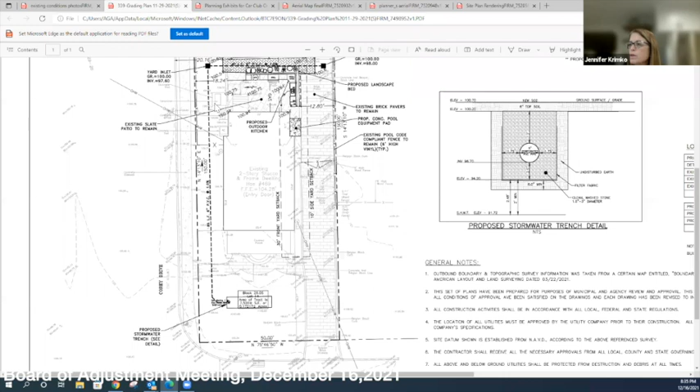Yes. To your knowledge, when the generator was put in, did the installer get all the necessary permits? Yes, I hired a contractor who took care of getting all the permits. When it was installed, you had no idea it was in violation—you thought it was put in as was approved. I actually got approvals for every part of the job, so I was thinking that I was in compliance.

According to the zoning officer, it was supposed to be installed on the other side, and then it was installed in this non-conforming location. Why was it installed here? Is it possible to move it to the other side, or does it have to remain here? If it's on the other side, it's going to be in the driveway. And didn't you also tell me it had to do with the run from the panel as to the location of where it had to be? The plumber made mention to me that it had to be the first thing off of the gas meter. Gas meter being on the opposite side of the house, on the Corey Drive side. That's why he put it where he did.

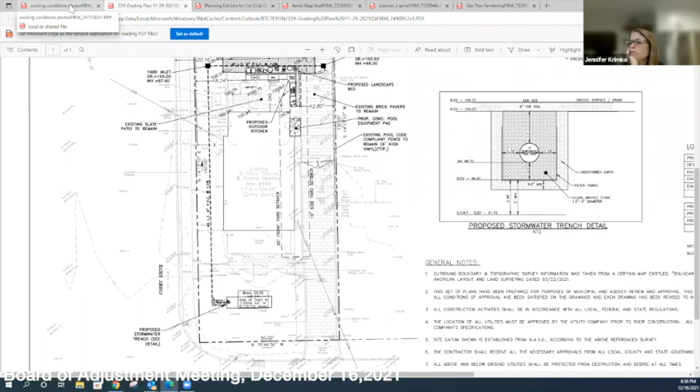How long has it been there? A little over a year and a half. Have there been any complaints from any of your neighbors that you're aware of? No. And in looking from Corey Drive, is that generator visible in any way? No, it is not. By having it on the Corey Drive side, it's actually farther away from any of your neighbors than it would be on the other side. So when it does go off, it's going to be further away and less of a nuisance to your neighbors next door and in your backyard. That is correct. Okay, that's all I have.

Jen, are you amending your application to include that? The notice included it, so yes, to the extent my application needs to include it, yes, I am. And how many feet is that off the property? I'm going to have the engineer testify to that. It's in my notice, Mark. I don't remember off the top of my head. I'll check it.

Thank you. So, Mr. Chair, that's all I have for Mr. Sardo. I'd like to call— he's open to questions from the board, and if there are no questions, I'd like to move forward with the engineer and the public. Does any board member, before I switch to our engineer, have any questions for the applicant?

No board members. Okay, anybody from the public have any questions for this applicant?

All right, let me move on to Mr. Worrell, your engineer. Hopefully when we're done with Anthony, he'll say he's satisfied and we're good to go.

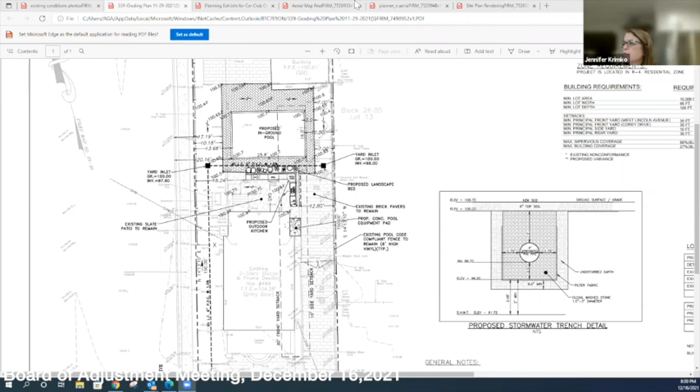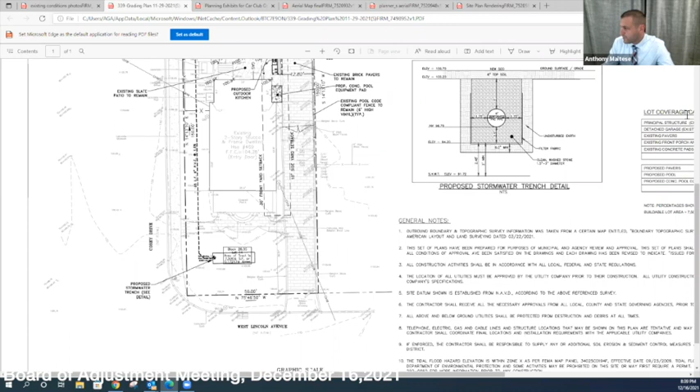The property is situated at 469 West Lincoln Avenue on the corner of West Lincoln and Corey Drive. It's in the R4 zone. The requirement for the R4 zone is a minimum 10,000 square foot lot area, whereas we have 7,500 square feet, so we're undersized. The lot width requirement is 90 feet, and we have 50 feet, which creates a skinny lot. We essentially have a hardship in that we're much smaller and narrower than would typically be allowed, and on top of that, we're a corner lot, so we have 2 front yards.

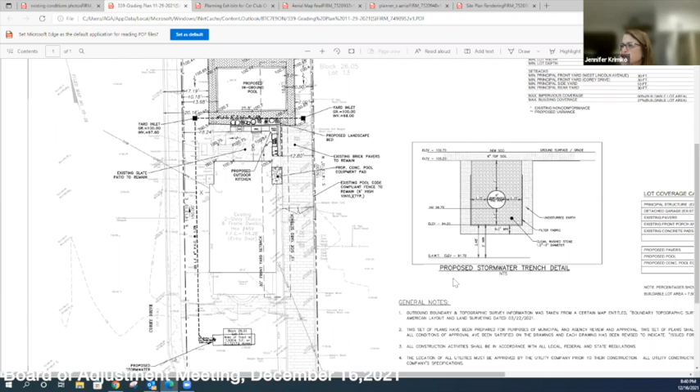You can take notice that per the last letter from Mr. Maltese, we adjusted the front yard setback to 30 feet from Corey and also from Lincoln. Knowing how many other members there are and recognizing what the board is interested in as it relates to this application, let me walk you through it — the changes to the plan to conform to Mr. Maltese's letter are not as important as what we're proposing here today.

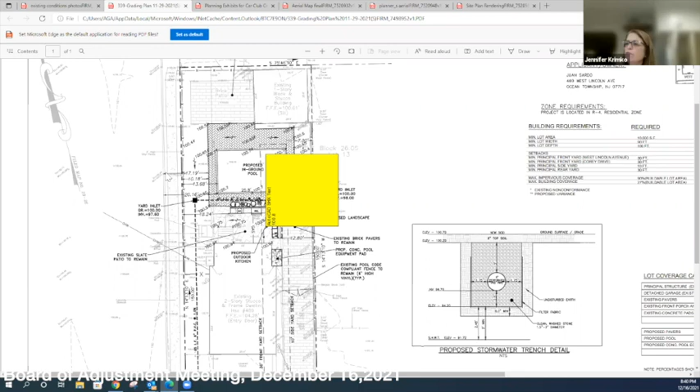So we're proposing, where I'm pointing out here, an in-ground pool behind the house with a patio and an outdoor kitchen. Is that correct? That's correct. Okay, and what is the setback of the pool from the Corey Drive property line? The pool is 13.68 feet, and the patio is 10.1 feet. Okay, so both the pool and the patio would conform on that side if it were a side yard, correct? Correct. And the same goes for the kitchen — the kitchen is 18.24 feet from the front property line.

Now, in looking at the east side, the plan shows the pool is at 10.5 feet, so that does conform. There's a 3-foot section of the patio that is 7 feet, which is permitted, but in the areas where the patio widens, it's technically supposed to be cut back to 10 feet. Is that correct? Yes. Okay, so we're just asking for a variance for those portions of the pool patio that are not at the east end of the pool, just so we can have a squared off patio. Yes, that's correct. Okay, and it's obviously much farther away than the existing garages, and there is a fence on the east side as well.

And you have an area here that you indicated as a proposed concrete pool equipment pad on the side by the driveway. That's behind the fence, and that's in a conforming location and would be shielded from view. Correct. Okay, and to answer Mark's question, approximately what is the distance of the generator from the front property line on Corey Drive?

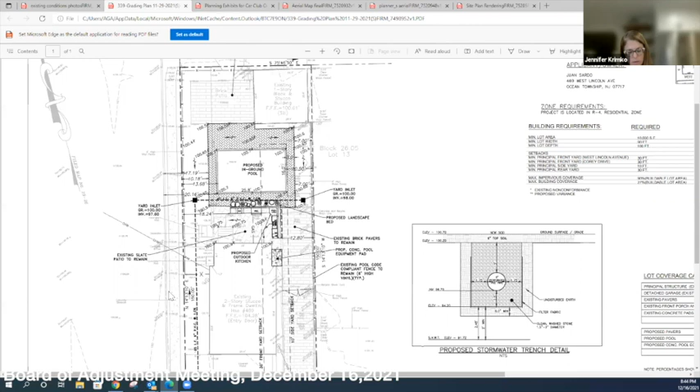Item 6, we agree that it's in Zone X, and we'll clarify that on the plan. Yes, we did. Okay, what utility service connections will be extended to the kitchen area? Water and gas. I would assume electric too. We don't have electric shown, but I would assume electric as well.

So if the board were to approve this and it is going to be electric, you would also show that on your plan as well? If they like, yes. Mr. Chair, that's really all I have as it relates to this.

Let me ask our engineer, do you have any comments, Mr. Maltese? Just a point of clarification, I scaled the drawing and I measure 7 feet for the generator to the front property line, so I want to make sure that's corrected for the record. The revised plan did address the comments I had in my November 12th letter, so I don't have any other concerns. I believe the stormwater was the biggest concern of mine, and that was sufficiently addressed.

So I'm fine with this. Okay, thank you, sir. So does any board member have any questions for this? I just have one question.

Can you give me the approximate dimension of the extended pool patio? It only runs for what, 10 feet more, at the point where it's wider than 3 feet? I'll get you that number. Approximately—I would put that in the resolution. That's fine. If you just send me an email, I'll scale it out and get you that number.

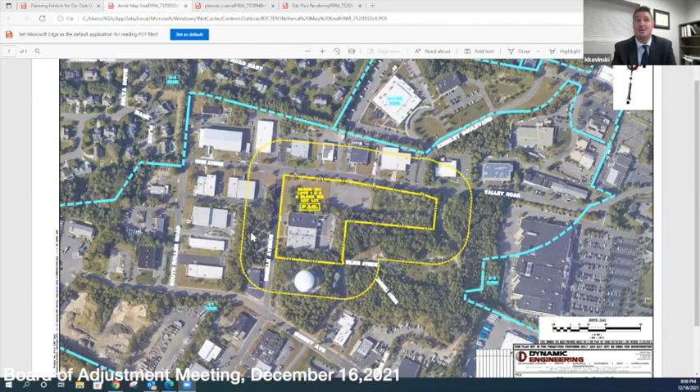The site is located within the I-1 light industrial zone. There's currently a 32,758 square foot existing multi-tenanted warehouse facility with parking lots on the east and west sides of the building. There are 2 existing driveways, one for each frontage, and the remainder of the site is mainly open space and wooded areas. The aerial in front of you is a color exhibit of the site and surrounding areas.

To the north, which is the top of the page, we have Rose Avenue with commercial and warehouse uses beyond. To the east, we have the township-owned property with Wegmans beyond. To the south, we have the township water tower and commercial and warehouse uses beyond. And to the west, we have Brielle Avenue with commercial and warehouses beyond.

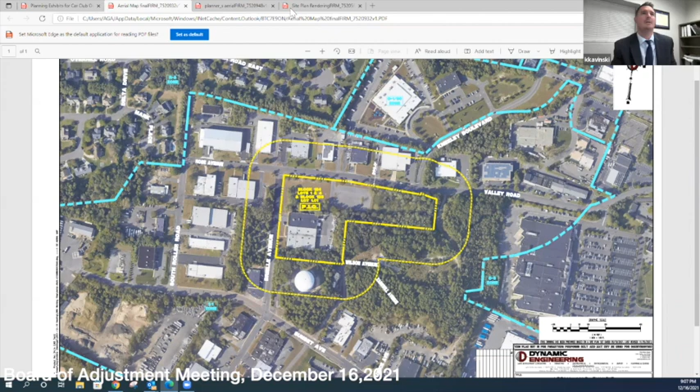Jen, do you have the minor subdivision ready to go? No, I don't have that one up. It's no problem. So as part of this application, as we said, we're doing a minor subdivision, and I believe it's referenced as A2 in your packets.

The applicant is seeking a minor subdivision to relocate the existing lot line between the applicant's parcel and the township parcel on the eastern portion of that drawing. The applicant proposes a property swap between block 184, lot 1, and the township's property directly to the east, which is block 180, lot 1.01. This will create 2 new lots and allow for a more regular lot configuration, as well as reduce some of the retaining wall heights as part of our application. The applicant's property would grow by exactly 4,646 square feet to a total of 6.5 acres, and the township property would decrease by that same amount to 1.26 acres.

The township currently has a non-conforming lot depth of 127.7 feet, and the applicant's parcel has a non-conforming lot depth of 191.7 feet, where 200 feet is required, with the proposed subdivision taking place.

Well, wait, let me jump in. The lot depth is really technical in nature, it's just a matter of the irregularly shaped lot, and you measure it at its shallowest point. But the lots, even though the lot depth is technically getting smaller on ours, the lot's getting bigger. That's correct, it's just that some of the land we're buying from the town is shallower, so it goes towards our average. So we're not really changing our configuration. Not at all, it's just a technical variance where we're getting more lot area at a shallower depth. Correct. Okay, sorry, so yeah, no problem.

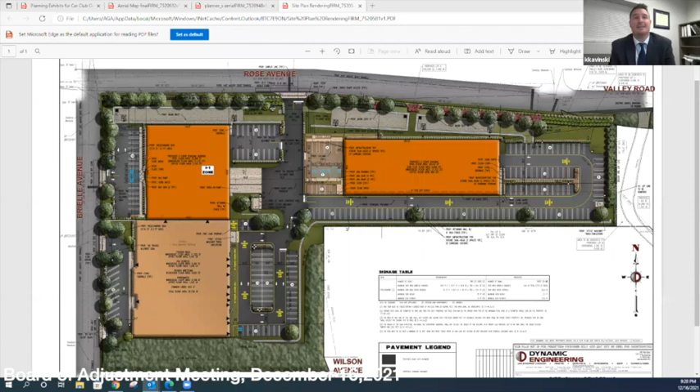We're proposing three freestanding signs for the development. One sign is located along Rose Avenue, west of the driveway access. It's 35 square feet in area and 7.5 feet tall. And then we have two signs along Brielle Avenue near both driveway entrances. They're really, as the board will see, more site identification signs than anything else, with the address. Yes, and the area of the signs combined is less than what would be permitted for the two signs.

Mr. Chair, that's the sum of the engineering testimony. I would ask if Ben or Jim have any questions. For 21 years I've been saying Bill and Jim, so once in a while when I get tired I might slip, I apologize.

I'd ask if the board professionals have questions, the board, and then obviously the public. No, I don't have any questions. Does any board members have? Ms. Tallarico, I have a question.

What exactly is a car club? What type of business is this going to be? I know that the architect who designed it is going to go into great detail as to what it is and how it's going to work. It wouldn't make sense to you without seeing the floor plan. That's why we're waiting. Okay, thanks.

Sorry about that. Any other board members have a question? Just one question: the land swap, was that identified?

Yeah, I can, if you bear with me one second, because I was able to email myself the plans while we were waiting, and I can show you. Just bear with me one second because I just realized I don't have the architect's plan, so I need to do that. Yes, I can show you, it's on the subdivision plan that you have, but I'll call it up here. It's on page 2 of the subdivision plans if you have them. Give me one second, and I'll share my screen again.

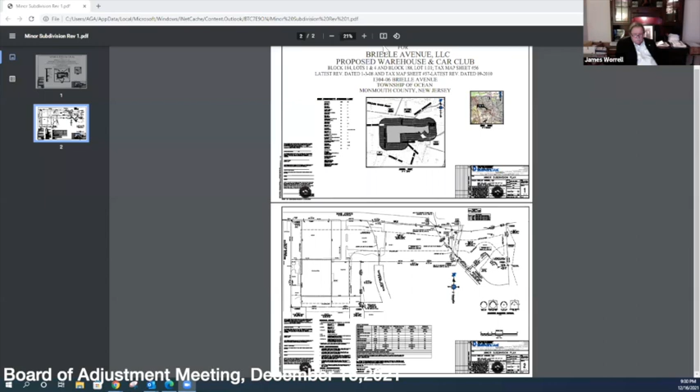Let me know when you can see that. I can see it. Okay, so I'm going to blow it up a little bit more. This shows a portion of the existing lot line between our lot and the town's lot. What the town is giving us is this area here. We're giving them this area here because their road currently goes over our property. So we're basically swapping them for the portion of our lot that the road goes over. And then we're also giving them a money payment for the difference in the value of the two parcels. That was all done by ordinance, more than a year ago. So that's all the land swap is: we're giving them some in the back for the piece in the front.

And there's a very, very small triangular piece that's being added to the Valley Road right-of-way. If you look right here, let me blow it up even more, sorry I didn't have these before. This small portion right here will be donated to the town for the Valley Road / Rose right-of-way, so it'll be a straight frontage along the front. Okay, thank you.

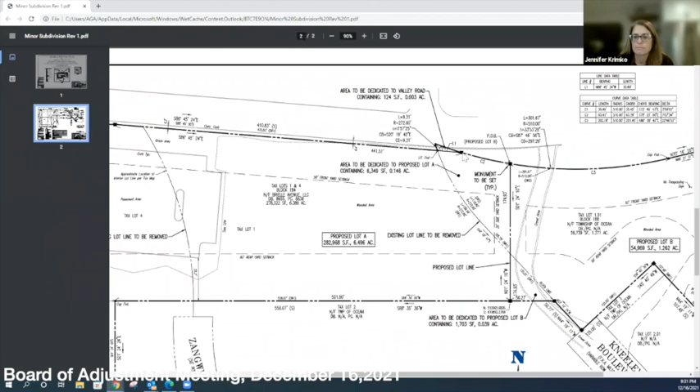Do any other board members have a question for this engineer? You mentioned that I have a quick question. Oh, I'm sorry, go ahead. Can you hear me? This is Gino. Yeah, go ahead, Gino.

So basically, what we're going to be storing in those warehouses, what type of cars are they? Are they collectors' cars? We didn't get there yet, Gino. Okay, the next witness is going to tell you all about it. So again, the freestanding building will be the car club and the car storage. The addition to the other warehouse will just be typical flex warehouse space. But again, the architect is going to give you all the details of how this car club is going to function, what's going to be inside it, what's going to be stored there, all that good stuff.

Okay, and I will tell you, as soon as I introduce the architect, I'm going to put up this color rendering. It is going to be the singularly most beautiful building in all of that I-1 zone, for sure.

Does anyone from the public have a question for this engineer? I had a question, this is Anthony DeGenero. Go ahead. You mentioned that we'll be cutting into essentially a hill. How much soil are we taking out of there? What type of export are you looking at?

I don't have the number right in front of me. It's less than what was previously proposed for the site when the design was done previously. We dropped the wall about 4 feet. We're not talking about a substantial cut. We are filling on the other side to flatten out the area as well, so we're not talking about a lot of fill off the site. A lot of it will be used on site. Correct, yeah, we're essentially cutting into the hill to then flatten it out on the other side to flatten the site out.

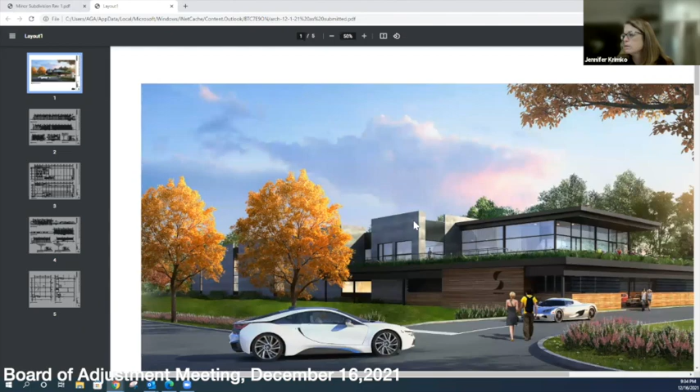Thank you. Okay, Dave, I'm going to start with the pretty picture to show the board what we're proposing for the car club site. You can tell me which page to go to for your testimony as we go through it. Certainly, so this is a rendering of the car club building. Again, there are basically two buildings on this site. This building is along Rose Avenue, and the view is from Rose Avenue looking into the entranceway off of Rose Avenue.

So what you're seeing is a concrete and steel building. On the left side of the photograph, you're seeing the car storage, that warehouse word that's been used - that's the common car storage area. To the right of that, on the lower level, is enclosed parking, and on the upper level are the social areas for the club. So what we've done is we've kind of double dipped here, where we've created a secured parking area for car club members to drop their car off. What you don't see by the two people just to the right of the cursor is that there's a gate that slides in front of that opening, controlled by car club members - it will either be RFID or a key fob entrance for members to drop their vehicles off in a secure area. Above that, we created a green roof with outdoor spaces to enjoy the exterior, and also a glassed-in area for the social events.

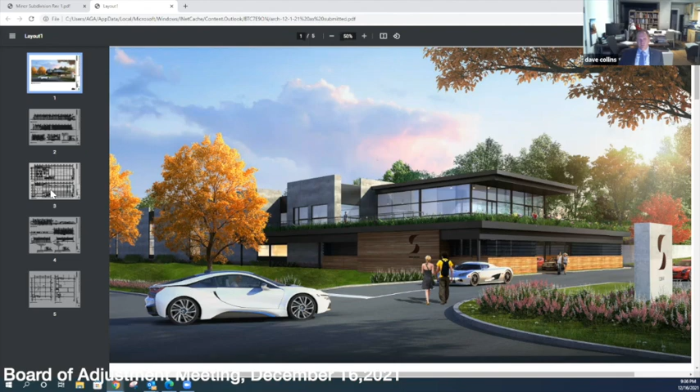Okay, should we go to the floor plan? I think that might be helpful to the board to understand. Yes, that's page 3. Scroll to the bottom of the page, please. Before we go in, let's take a minute to explain what a car club is.

Right, exactly. So there are several of these around the country at this point. There's been a need for people with high-end luxury cars, classic cars, to keep their vehicles in a secure, climate-controlled area where the cars can be protected on one hand, and on the other hand, a need for these people to socialize with each other, to meet and look at each other's cars, talk about cars, enjoy the cars, and enjoy each other's company.

This is a members only club where people will come and bring their car, or not bring a car. They can still be a club member if they're just interested in cars, and they can come view the cars, talk about the cars, and hang out and relax in the club.

So like a gym, but for car enthusiasts, is probably the easiest way to say it. Along the bottom of the page is the main entrance into the lobby area, which is our secure point. Through those double doors, members will come in and be checked in by the receptionist. We have a car on display in that area. It's an open, high ceiling area with a staircase, and just to the right of the staircase is a car elevator. Just above the lobby is glass walls that view out into the large car storage area.

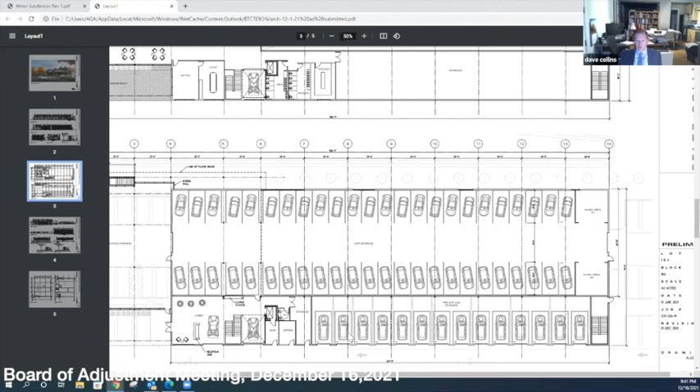Okay, so now I'm going to move over to the second floor. And the area here with an X, that is the two-floor high ceiling overlooking. So under here is where the majority of the car storage is. That's right, the X represents open to below. So you're on the second story and you're looking down into that space.

So just on line 6, Jen, if you could put your cursor on line 6 -- right just here, straight up, go up a little higher. That entire area is floor to ceiling glass. So when you're on the second floor, which is everything to the left of that line, you can look down into that space and see all the cars from that space.

Okay, and that area is the lounge area, the club lounge. We've also created a cigar area that's walled off so that we can control smoke.

We've got some pool tables, ping pong tables. We have a car lift that will bring cars up to the second floor so that we can display a car on the second floor. Couches, tables, chairs, so that club members could lounge in that area.

We also have a balcony to the left, encircled with a vegetated roof, so whether you're in the lounge or on that balcony, you're surrounded by greenery on that second floor. There's also access out to another balcony on the north side, again wrapped with vegetation, and a second emergency staircase that leads down to the covered parking area. That gives us two means of egress right in this general area.

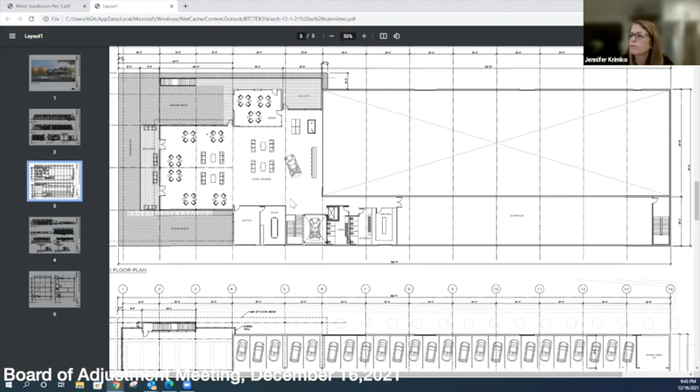Okay, so would you like me to go through the elevations on all four sides quickly? Sure. So let me make it a little... no, make it a little bit smaller. There you go, that's perfect.

Obviously this is modern architecture, and we feel it's very fitting for the type of use. We're going to have a lot of high-end luxury modern vehicles, and also classic vehicles in the space, but this kind of minimal modern architecture really fits. We've used tilt-up concrete panels for a bulk of it, with glass relief in areas to break down the facade into smaller chunks. We've used a very high-end flush metal finish that you would probably see on a higher-end car dealership, so it's a bit of an homage there.

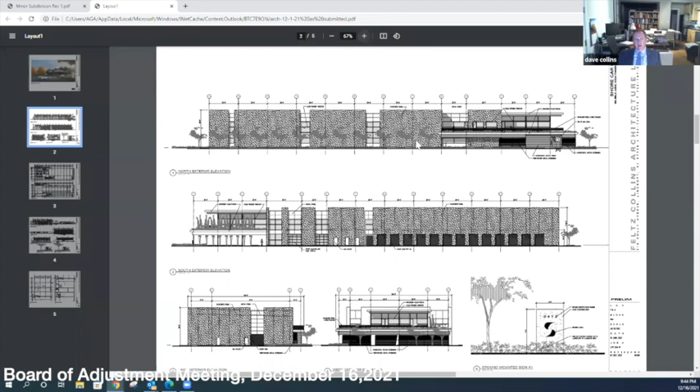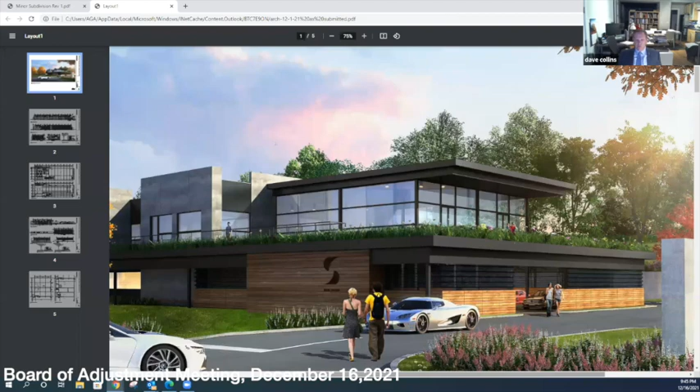A lot of curtain wall and glass, deep overhangs on the club lounge, and again the vegetated roof. We softened the area where people come into the drive aisle by using wood that essentially acts as a fence, and perforated metal. In that rendering you can really see the wood and perforated metal. If you go down, you can see that natural wood and the perforated metal just above it. It doesn't completely enclose that covered parking area, it keeps it kind of light and soft. So that's how we tried to treat the entranceway into the site.

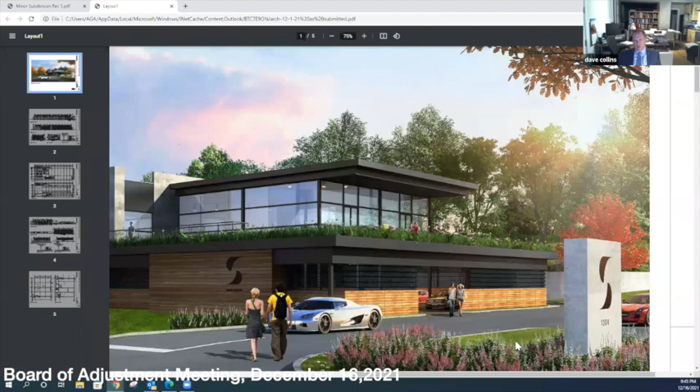This is a good one to show one of the three signs. It's just a monument sign with a symbol and a number on it for the address. Since our buildings are tilt-up concrete, we wanted to bring that material back into the signs, so the architecture of the signs relates to the architecture of the site. They're very clean, very simple, same concrete finish as the building, and in this case we have the car club's logo and the identification number.

If we go to the drawings, you will see essentially the same sign. Yeah, go down to that one, perfect.

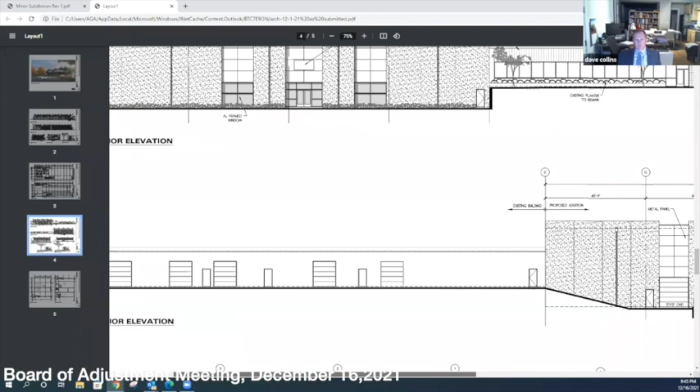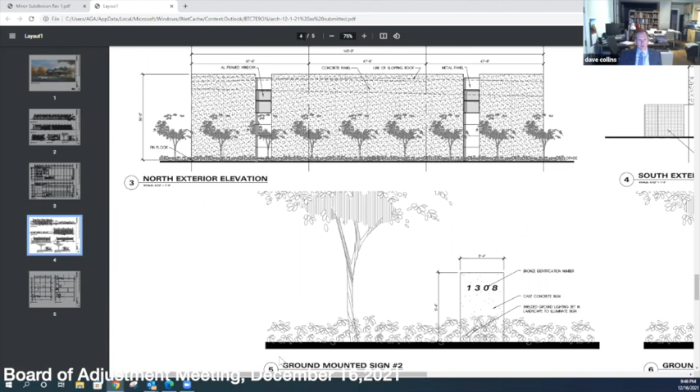These are the two signs we're proposing on Brielle Avenue, again the same design, clean, and all these signs will have are the identification numbers. One reason we think three signs is important is we have basically three entrances into the site, and multiple addresses already on the site, so we feel it's best to make sure emergency vehicles know exactly where to go from the street, whether to one parking lot or the other, and know exactly which building they're going to. Same with people coming to visit the building, they can look at the address and know exactly where to go. As testified earlier, we're still respecting the overall square footage of monument signs, even though we're asking for a third sign, it's still less than what we could have had as two signs.

Okay, and while we're on this page, let's talk about the addition to the existing building. Sure.

If you stay right there for a second, this top drawing is a good one to help everyone understand. This is the east elevation. The portion that's not rendered is the existing building, which is a low building, only about 16 feet tall. If you look to the left, there's an existing slope to the grade that slopes down to the existing site, then flattens out to the existing parking lot, and then steeply slopes down to the level of the car club and the finished floor of the addition.

So these retaining walls we're talking about are really isolated in terms of cut and fill. We're pushing into an area in the back of the site that's steeply sloped, and trying to balance out some of that cut and fill. I'm not saying it's fully balanced, but although our walls are tall, it's because the existing condition is a very isolated, steeply sloped site.

This is the addition facing the car club that we saw on the site plan with the two loading zones. We can now get a proper height of a warehouse without putting a giant monstrosity next to an existing building. Because the grade slopes down, we're picking up half a story in the grade, so we end up about a half story taller than the existing building. This really illustrates the site perfectly.

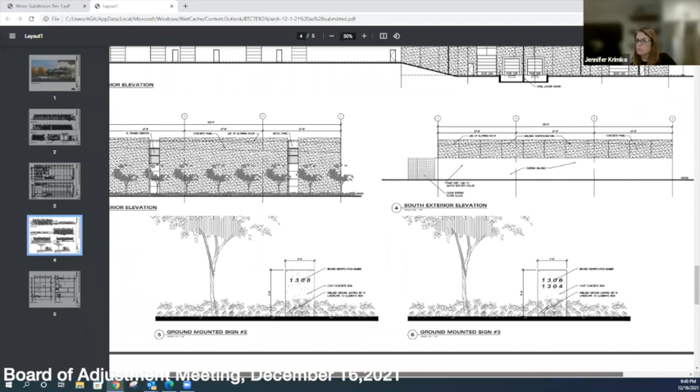And then again on Brielle Ave, if you can scroll over. Where's the other elevation? To the right—here's south, here is north, east. There it is. So this is the Brielle Avenue side. Again, you can see on the right-hand side the existing building.

Again you see a retaining wall in between those two buildings, mitigating that slope at that area. To the left of that is our addition. We use glass storefront, glass entryways, metal panels, and a break in the parapet line, again to break down the length of these walls into smaller pieces.